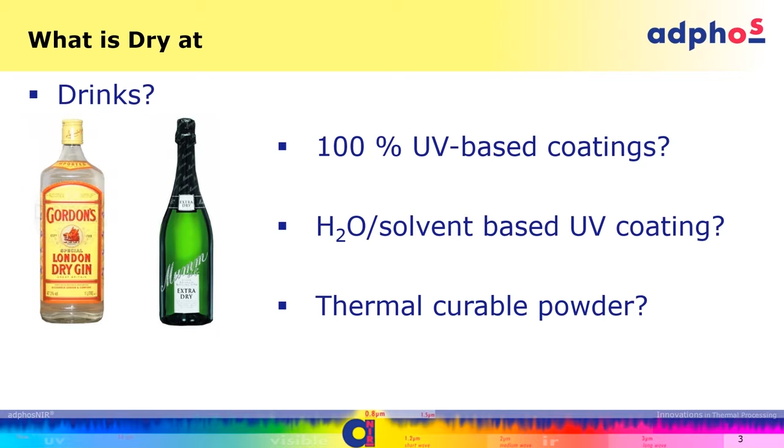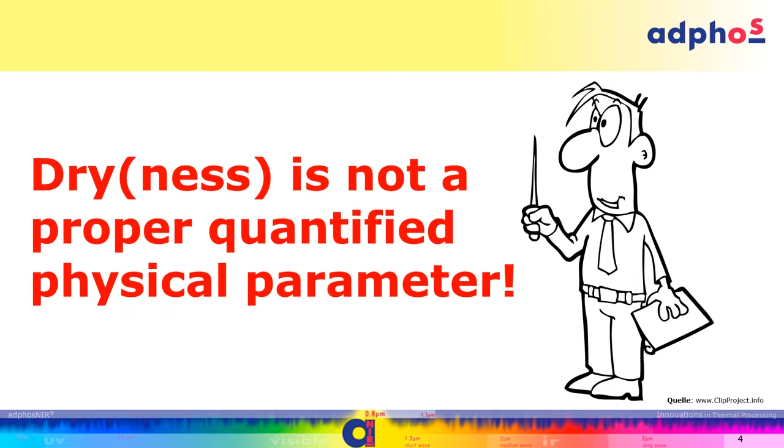Finally, thermal curable powders are typically called dry powders. A powder is dry from the very beginning. If it's wet already, it's a slurry, and that needs something different. So the definition of drying is something which is pretty much individual, but we can conclude that there is no proper quantified physical parameter for dryness or drying.

That's why we talk about the next step: when the ink drops have reached the surface, how the process proceeds to getting it finally fixed. We have to separate two different kinds of substrate types. One is the porous type, which can absorb and allow penetration of a liquid phase through the system. On the other hand, we have fully covered, shielded surfaces, substrates, and we are not only talking about graphical applications—this could be metal, this could be glass. So therefore, the two types have to be separated.

And what we have heard already from the very first presentation this morning, the ink generation, the drop generation, is done in microseconds. The reaching of the surface and their further spreading also takes place in a very short time, definitely more or less in the range of less than a second. In some very specific, prepared, pre-treated substrates, it might come up to 2 seconds.

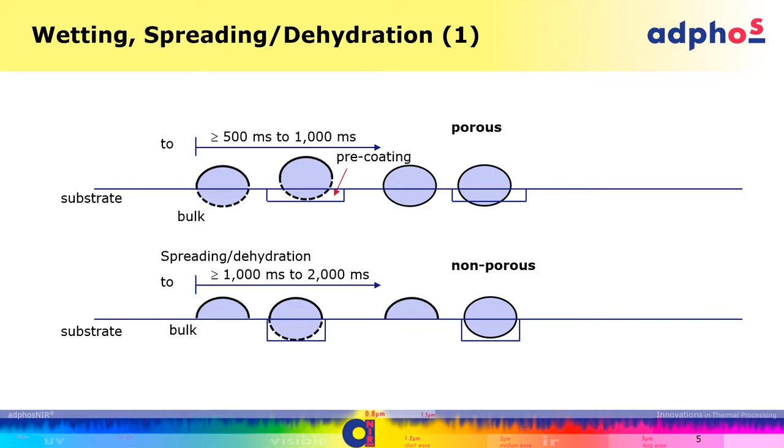This can be overcome if you are able to set the ink in the very first time before you have the opportunity for it to really penetrate inside the substrate, and it's essential that you avoid penetration inside the substrate. On the other hand, if you have a non-porous material, intercolor bleeding is something which is well known. So therefore, fixation before the colors run into each other is also crucial for print quality.

And all that shows you that the drying technology is really driving all these aspects. Before we come to that, I think I would like to go through some principal data we need for the applications. Number one: you see here an absorption diagram of the amount over the wavelength for dye-based inks.

What you can see is, in the optical area, sure, there is a difference between the different colors, CMYK, but above the visible light, above the visible spectrum, all these colors remain with the same absorption—different in the different wavelength range, but identical—which means each color will absorb the same energy at a given wavelength. This is only different in the optical area, and more or less the same also in the UV area. That's dye-based inks.

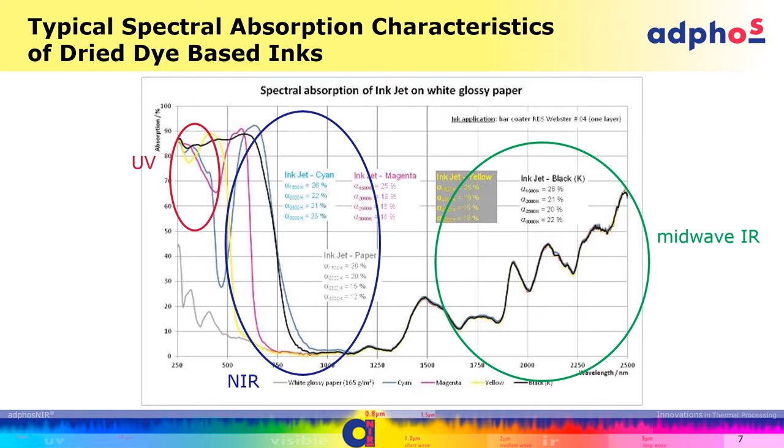Pigment-based inks look a little bit different. They show, again, in the visible light, their different behavior due to the color. They are pretty similar in the UV area, but in the non-visible IR area, there is still a slight difference between the different colors. And in the longer wave, these colors remain at the same level, but the black pigmented ink is still high, independent of the wavelength range.

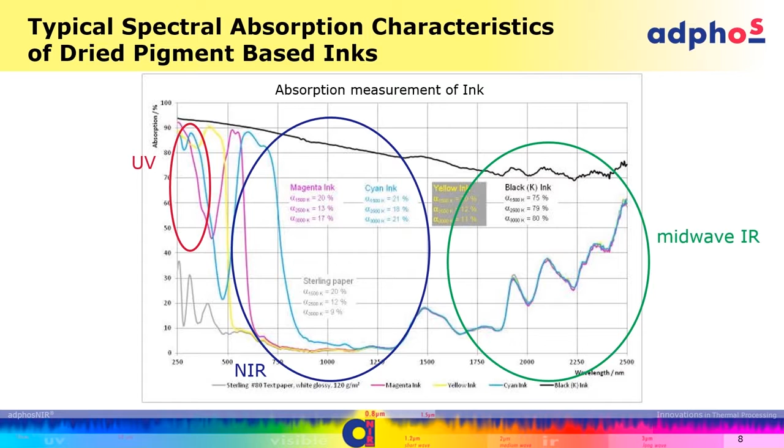That's an important effect, which we will see—a lot of people think it might be advantageous to run in the longer wave IR for drying purposes. Is that true? The next picture shows.

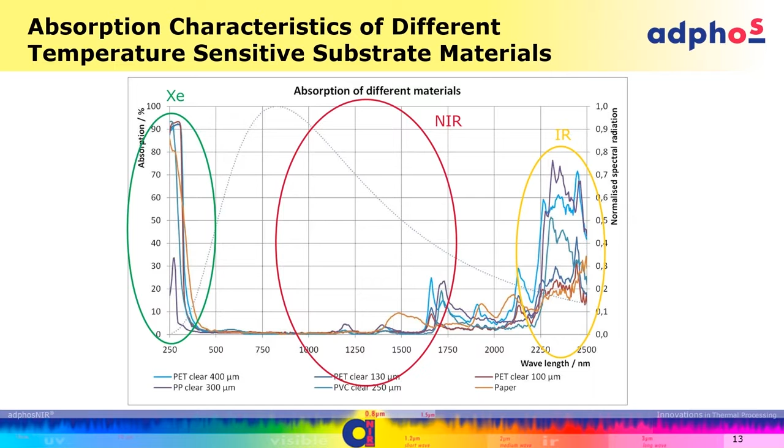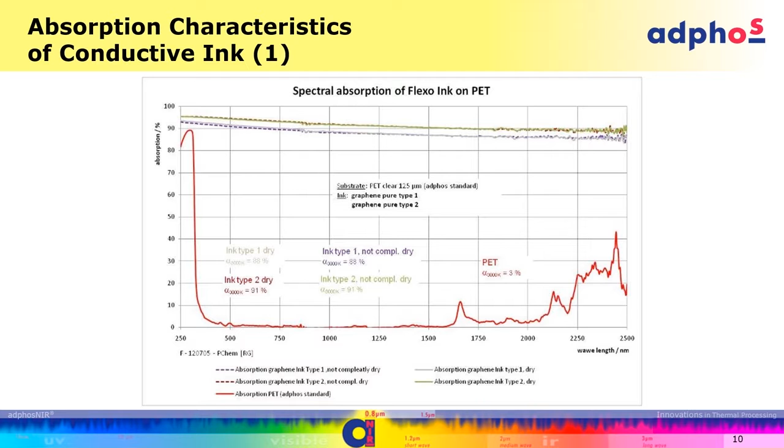In this graph, the absorption of the substrates is higher than the absorption of the inks. Just for clarification, I also wanted to show other coatings like PEDOT or the Flexo ink on graphene. There's a very low absorption in the NIR, a very high absorption in all areas, but the substrate is very low. That's why we can run these on temperature-sensitive materials.

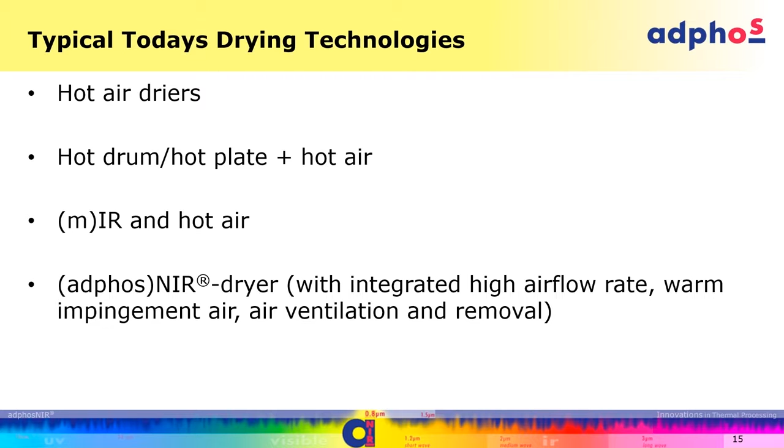Now, coming to the different dryer technologies which are taken into consideration today: hot air, drum dryers. If we talk about IR, most of the time we talk about mid-wave IR in combination with hot air. And then we have the other group of NIR, which was developed by us specifically with integrated high airflow and warm impingement integration into the process tunnel.

To summarize these technologies, I think it is easy. The hot air requires an airstream on the top of the ink film and the surface of the paper, because it doesn't separate between the paper and the printed area. And we have heat conduction onto the substrate, and due to the high temperature, we get out the water or the solvent, and get a solidification of the printed area.

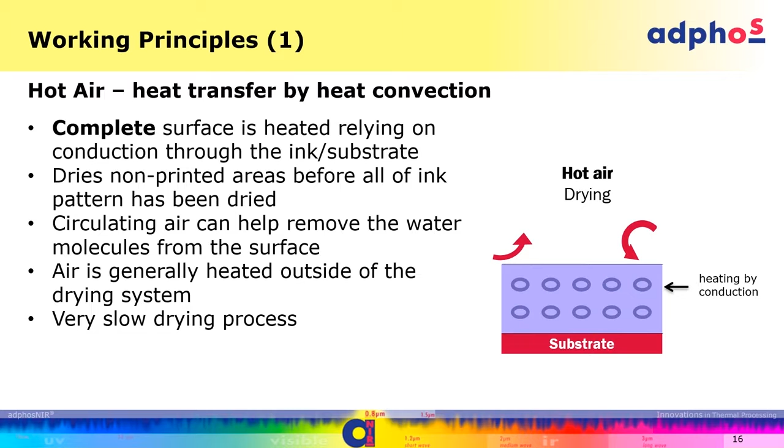But we have to take into account that this takes a long time due to the low energy density and due to the accepted lower airspeed we can run. There is a strong effect due to the increasing temperature that the viscosity of the still liquid film drops. So in the first area of this drying process, you have a stronger penetration inside of your substrate. At the end of the day, the drying process is only completed if the energy has been provided to heat up the substrate mass, and the very little part of evaporation of the water is a minor part of this process.

So at the end of the day, the substrate temperature is as hot as the printed pattern, and it takes a long time to dry out papers which have a certain amount of water involved.

If we go to a hot plate process, we even have a situation where we are not applying the energy to the printed side. We take it from the back side. It's an iron principle. So we heat up the back side and get the heat through the heated surface, the substrate, and then by heat conduction through the back side of the paper it heats up and sometimes the printed area gets heated up and evaporates as well.

Here, the full mass must be heated up. Number one. Number two, in order to get a heat conduction flow, you need a higher temperature in the substrate than in the ink, otherwise you wouldn't have a heat flow. And number three, since you may have a thicker material, it takes a long time to get the energy through. Finally, if you are not applying a proper airflow and air ventilation in the system, which most of the solutions on the market until now have had, there is a very catastrophic energy balance to that.

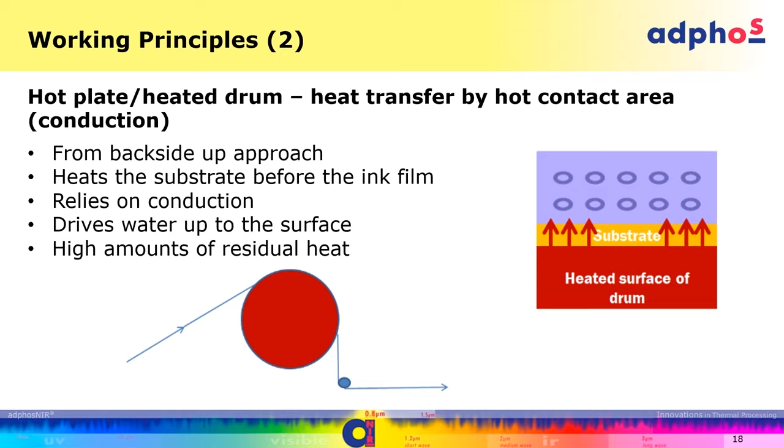The newly introduced systems right now have understood that air ventilation is important, so they have improved their systems a little bit. But again, the energy is fully used to heat up the mass of the substrate, and then finally a little bit of energy for the evaporation of the liquid phase, water or the solvent.

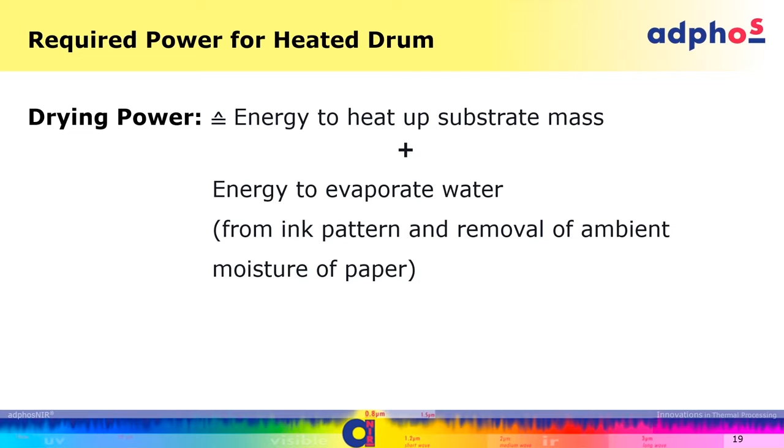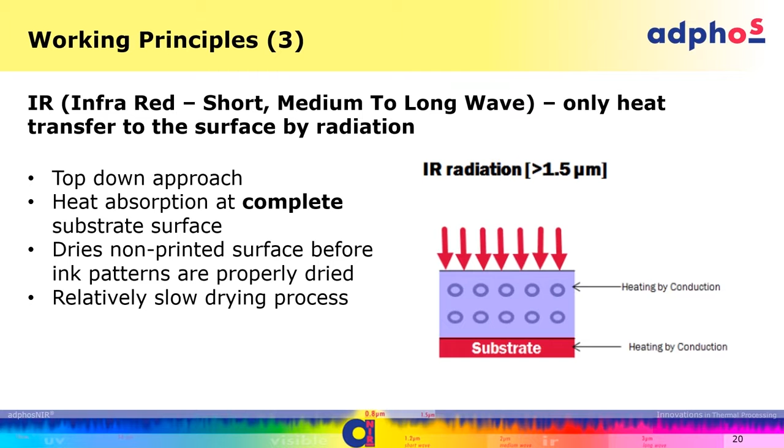Coming to the IR, mainly driven to the mid-wave IR, which is the most pronounced area, but there is no strong difference because the energy is absorbed again on the surface of the substrate due to the shown absorption characteristics of papers compared to the ink.

So the printed pattern - I like this photograph because it's yellow, magenta, blue, and black, so the YMCK. And if you now address this to a mid-wave IR system, it will look like that. There is no difference in the contrast between the paper absorption data and the ink, besides black. And that's how your printed pattern is seeing the energy.

And that means if you now assume that these printed patterns are wet, so more energy is needed for that, the time it takes to dry everything is such that the non-printed areas are fully over-dried before the wet ink is finally fully dried.

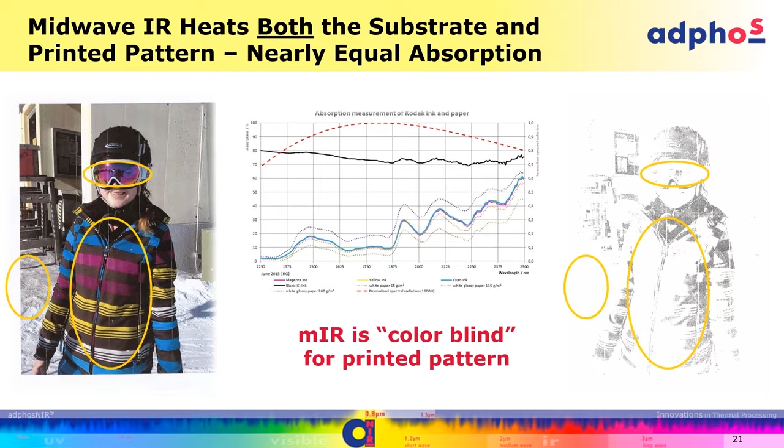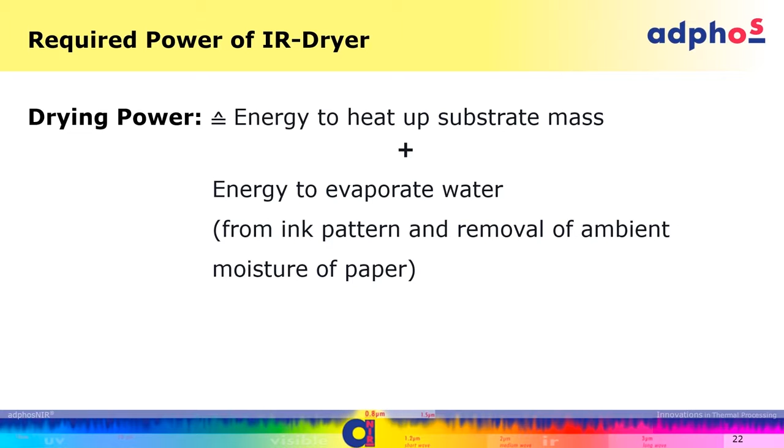And that is why you find out in hot air dryers and mid-wave IR dryers that your remaining ambient moisture content in your substrate is 2%, maybe 2.5%, while the typical environmental moisture is 5 to 5.5%, and that changes significantly the quality of your printed product. It is totally wavy as you see it. On the other hand, again, the energy is absorbed at the surface, but in order to get that, you have to heat up the full mass and then get the water evaporated.

And now we talk about the NIR. What is the effective way of not absorbing the energy in the substrate and having a higher absorption in the ink, except the black? That is because we are penetrating inside of the coating, and because we are even going through the substrate in this case, we have to put in a proper reflective area so we get a multi-reflection, and the ink is absorbing mainly the energy.

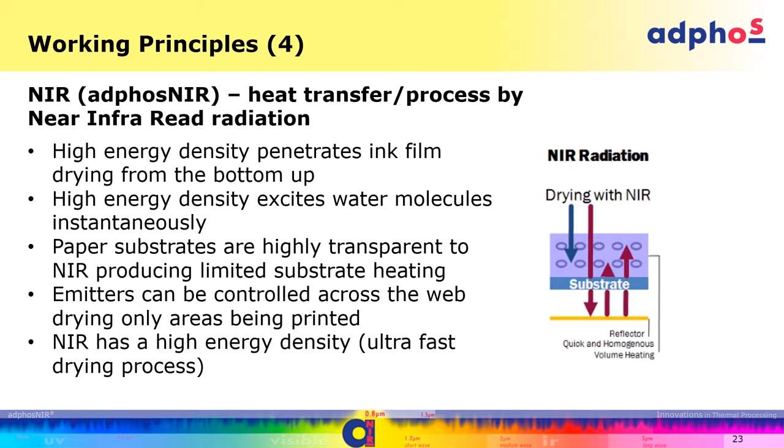Therefore if we apply sufficient energy density, the ink is dried more or less instantaneously. We can build a very small dryer. We can reduce the drying time to a minimum, down to tenths of a second or even below. This allows us to apply the drying unit immediately in between the inkjet nozzles because it requires so little space, or apply it immediately after the inkjet, so the time before it enters the dryer is also minimized to a very short time. And that all allows us to adapt more or less the drying energy to the printed pattern.

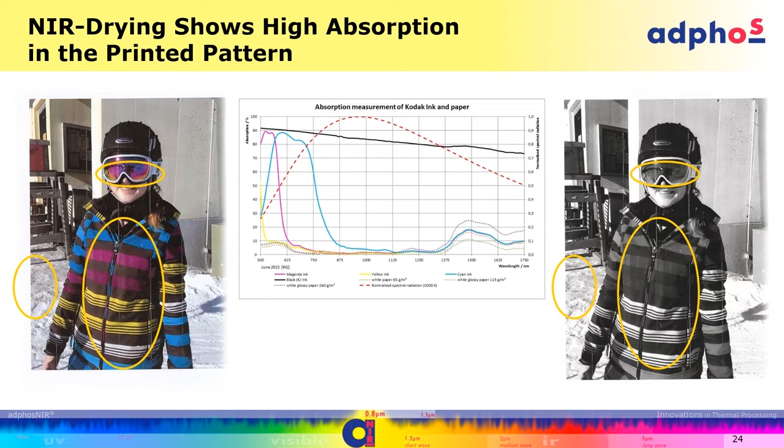This allows us to have a very low temperature in the substrate. And this allows us that most of the energy required to get it properly dried results only from the energy required to evaporate. Sure, we do not have 100% efficiency due to the differences in the absorption characteristics, and there is a heating up due to the heat conduction into the substrate. And having said this...

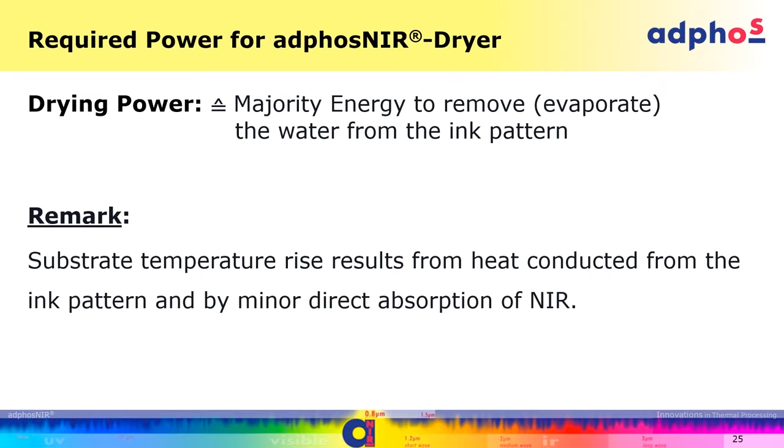A very thick paper has a certain requirement that at the boundary layer between the printed pattern and the substrate, we need a certain temperature to get proper adhesion. So therefore, we will not have a process finished on a totally unheated substrate. So there is a certain amount of energy introduced into the substrate, but significantly less. And that's the reason why we come to these specific advantages.

Number one, because we can do it instantaneously, we can fix the ink droplet immediately when it achieves the surface and arrives at the drying or pinning unit. We avoid mostly the penetration. This avoidance of penetration gives us the avoidance of swelling of the fibers on one hand. This also gives us avoidance of the water penetrating into the substrate, which requires more energy to get the water out again, due to the fact that this penetration process changes the porosity configuration while the water is absorbed in the substrate.

That is important as well. All the other techniques, let's say it this way, none of the aforementioned techniques allow us to evaporate the glycols, which are necessary for all of today's DOD inkjet systems. But now, why can NIR remove the glycol, since we are also not achieving the temperature which evaporates the glycol? Pretty simple effect: you do it instantaneously, very, very fast.

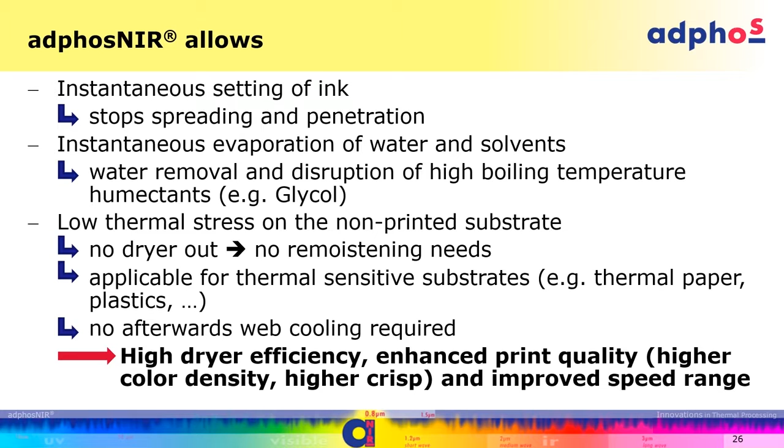Now some applications. Here, blue is before, red is with the adphosNIR technology. You see, the point is in all cases the same: we can run higher speeds, we can run fully coated materials at full speed, and the other way around - blue is adphosNIR and red is the former way. So we can run the full machine speed, uncoated as well as coated.

What is important, the energy is half compared to the mid-wave IR system. And this is something I can conclude for all the applications we have reviewed in the market. It is half to a third, down to a third, of the energy we require when comparing this with hot drums, hot air, IR, or a combination with hot air.

So there is a huge advantage of energy saving. I'm a nuclear engineer, and I would say energy is nice, but it's still too cheap today. So therefore, it is a nice marketing tool to talk about energy saving, but it's not really driving the operation cost. I think the much more important thing is we get flat products.

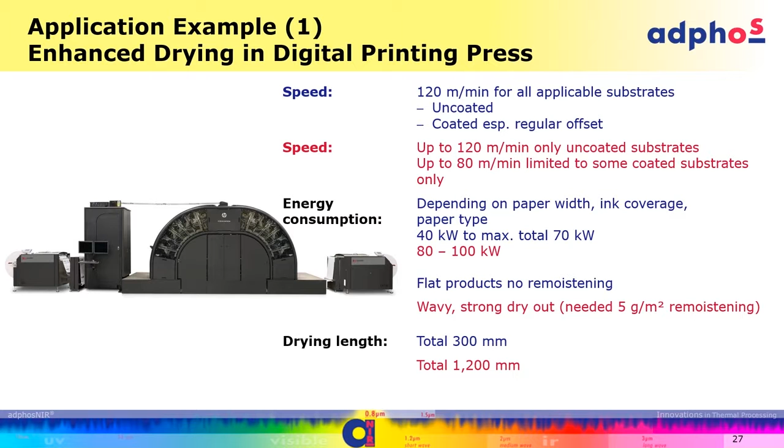And at the end of the day, there is a significant saving in space. Here is an application which couldn't be applied physically with an alternative dryer - that's corrugated boards. The system shown is a scheme because it's still under beta application and will be shown at Drupa next year.

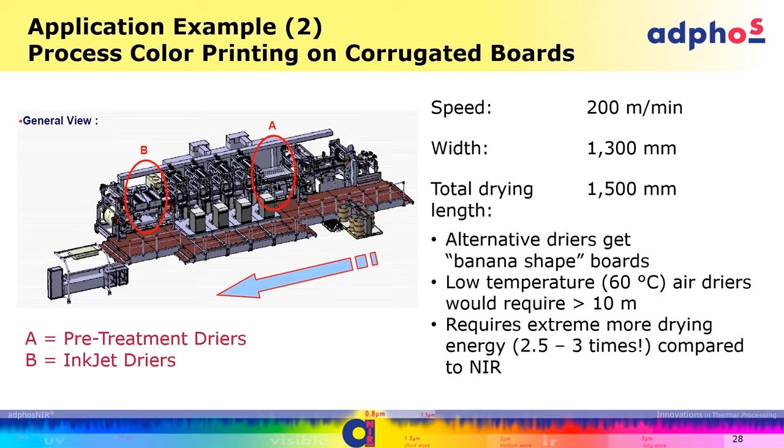Which I think is something you have to avoid if you want to use this as a display in the supermarket. On the other hand, as I said, there is a significant energy saving due to the fact that we do not have to heat up the full mass of the substrate. The only alternative you would have here is to run an air dryer at low temperature, but that requires, at these data, a very, very long press.

It's not limited only to graphical applications. I took this one - this is a flooring application, very wide width, lower speed, but also CMYK with interstation drying required. Why? Not because we cannot dry it afterwards - the problem is intercolor bleeding. To avoid the colors running into each other, we have to dry them in between before the next is applied.

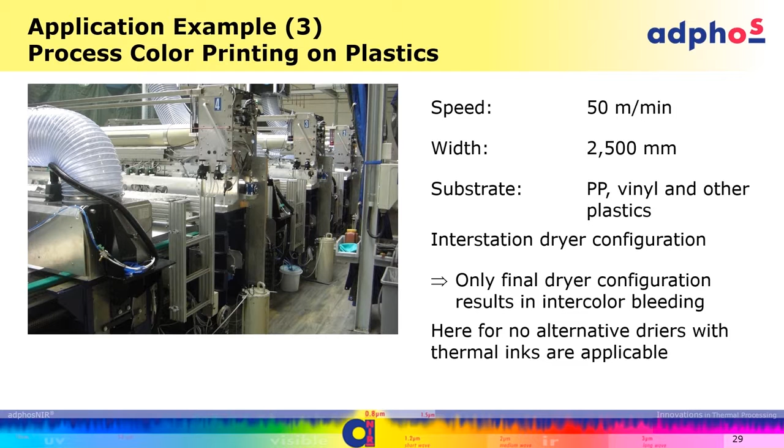You see the materials, you see what type of thermal heat stress is allowed on the system. With this data, there aren't too many alternatives to consider if we're not going for a pure UV application, which was the past former solution.

The big advantage of NIR is that because of the high energy density, we don't have to keep this preheating level as close as possible to the melting point, due to the fact that we can have a higher delta T, overcoming it with very high energy density up to the melting point. We can preheat, for example, plastics just above the crystallization point.

We could do it in air, at ambient, but then we would have deformation due to the crystallization change of the material. On metals, we do this from ambient, and the other advantage is this instantaneous melting allows us to avoid heat conduction into the structure, which gives us smoother surfaces. The adjustable heating size again allows a strong reduction in energy.

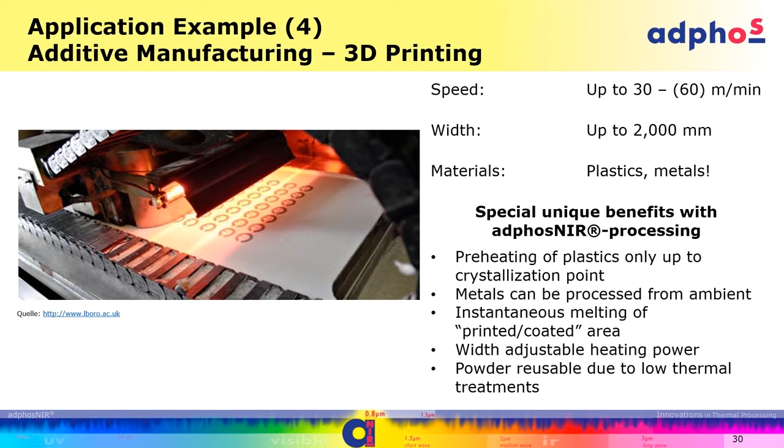But that's something which is still in the R&D phase and first prototyping.

Coming to my end, and that is unusual - that I'm in time.

The drying technology, as I showed, significantly influences quality and performance, and in many applications even drives the answer of whether we can do it with inkjet or not. If you want to do DOD inkjet on plastic materials, there is very little working space today outside of applying NIR technology, due to the thermal stress involved.